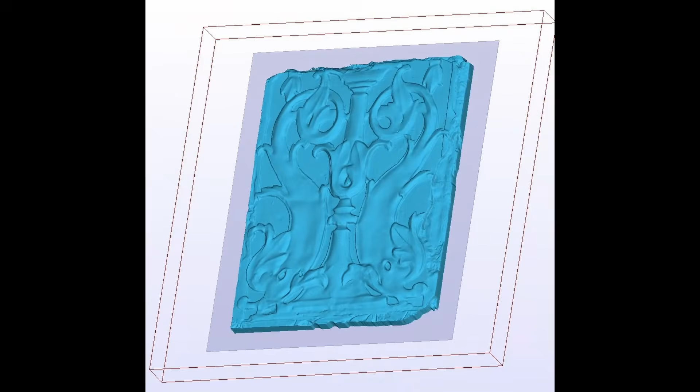From these molds, plaster casts were produced to create accurate, positive three-dimensional models. Each cast was then scanned using high-definition laser technology, preserving the original design intent and safeguarding the minute details that might otherwise be lost. The resulting scans generated exact digital files in the STL format, precise, measurable, and ready to advance to the next stage of the restoration process.

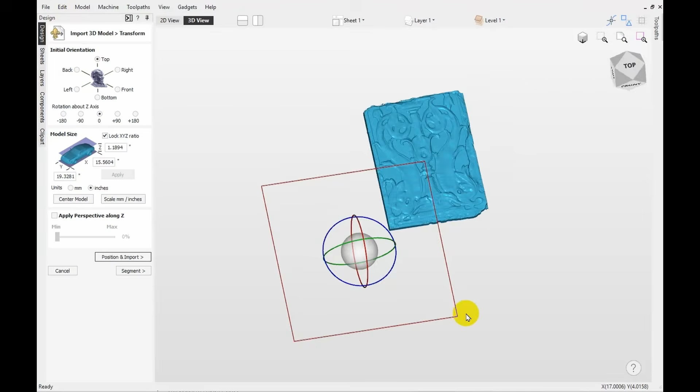The process of creating the lead overlays continued with the fabrication of custom wooden forms used to shape the metal. After importing the STL files generated from the scanned plaster cast, I carefully developed the necessary toolpaths to ensure accuracy and precision.

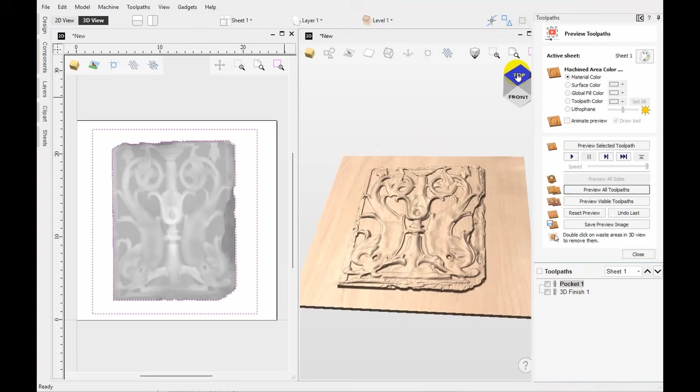In those instances where the original lead overlay was severely damaged and a silicone mold could not be made, I turned to the Vectric software and created my own.

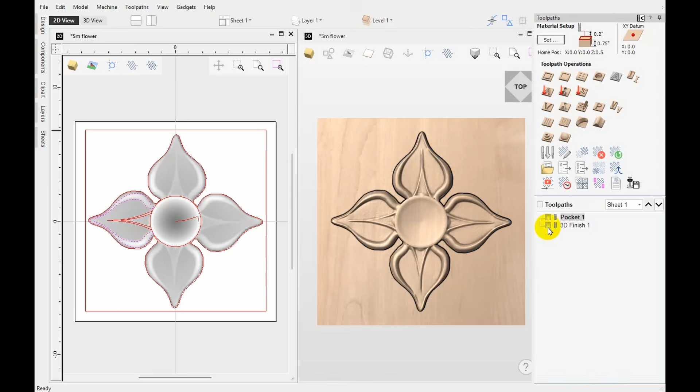Using the components and vectors, I generated a 3D model that looked very similar to the original. Once I was happy with the shape and contours, I created the necessary toolpaths, generally a pocket toolpath and a finish toolpath, to render exactly what I wanted out of my wooden block.

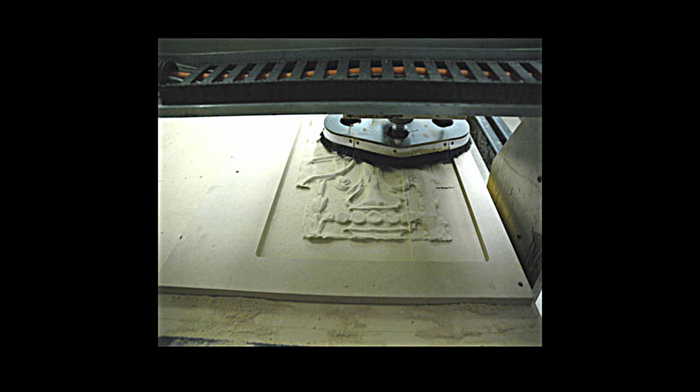Once I was confident the molds would perform as intended, I ran the program on my CNC machine. The finished wooden forms emerged exactly as planned, faithfully capturing every contour and detail required for the next stage. Excitement grew at the studio seeing the finished product from the CNC machine.

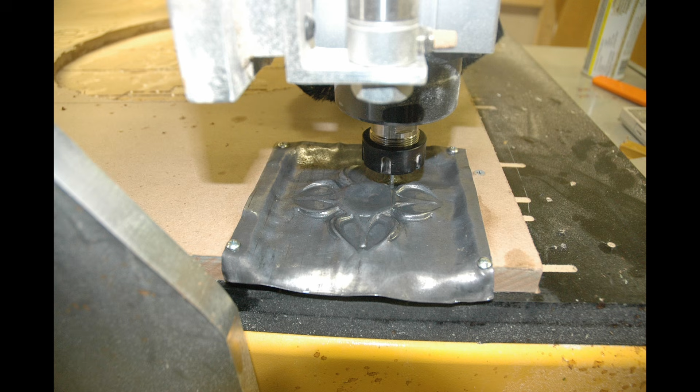With the molds complete, a sheet of lead was secured over the carved forms. Using a spring-loaded ball-bearing plunger, I adjusted the Z height slightly higher and ran the file again. My spindle was turned off in this case.

As the machine moved across the surface, the ball bearing rolled smoothly over the undulating contours, pressing the lead into the recesses and recreating the intricate relief with remarkable fidelity. After a small amount of trimming, the replicated lead overlays were complete and ready for the next step in the process.

This section of the video deals with the fabrication and gold leafing of the stained glass panels needed. The craft of cutting glass is rather old. A simple steel wheel is used to scratch the surface of the glass, and then it is broken along that line, something that's been going on for centuries.

The next step was important. The original glass was frosted, so we applied a diluted solution of hydrofluoric acid to etch the surface ever so slightly, to make it not as transparent as regular glass would be.

The construction of the stained glass panels, known as glazing or leading, entails the use of H-shaped lead strips, where the glass fits into that shape. It is then soldered together for structural strength.

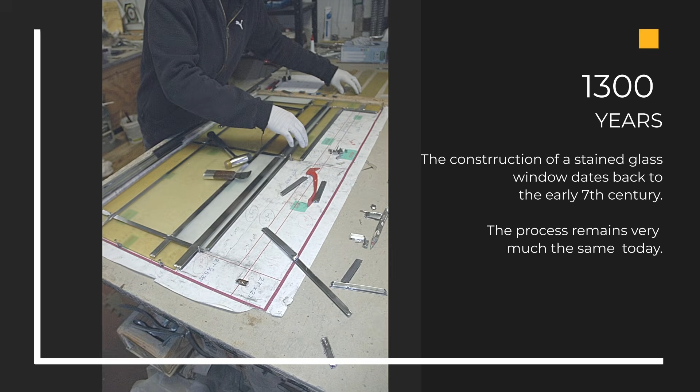Once the stained glass panel has been fabricated and soldered on both sides, the next step, puttying or cementing, is crucial. We use a specialized oil-based putty and force it between the lead came and the glass itself. This provides weatherproofing, rigidity, and strength to the overall panel.

Once the panel has been puttied and cleaned thoroughly, a zinc oxide coating is applied to the leads to ensure durability for the gold leaf.

Gold leafing or gilding was developed in ancient Egypt, with techniques for beating gold into thin, foil-like sheets appearing as early as 3000 BCE. The actual gilding process includes an oil-based size or varnish applied over the surface needed.

When the size reaches a slight tack, the gold leaf is carefully laid in place and gently pressed with a pounce pad or a soft bristle brush. Final cleanup of the glass around the lead overlays is an important part in the overall finished product.

Once the 65 replacement panels were fully completed, each one fitted with meticulously formed lead overlays and gilded with gold leaf on both the interior and exterior surfaces, we were finally ready for reinstallation. Every detail had been checked, every solder joint inspected, and every gilded surface carefully burnished to ensure consistency with the original craftsmanship.

With the studio work behind us, the focus shifted back to the building itself, where preparation was just as important as fabrication. The work site was cleaned to a pristine condition, presenting itself almost like a newly constructed space awaiting its first reveal.

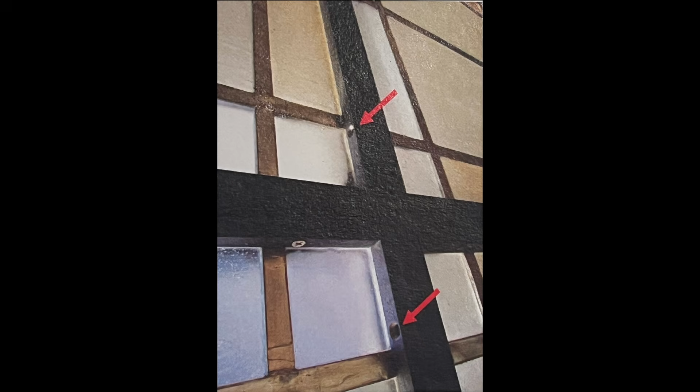Access to the large bronze frame positioned on the second floor mezzanine provided straightforward access and allowed the installation to proceed efficiently. One by one, the restored panels were carefully lifted into position and secured with bronze moldings and brass screws, each fastener tightened with deliberate care.

As the final panel was set into place, the transformation was unmistakable. When completed, the overall effect was nothing short of breathtaking. Light once again filtered through the glass, illuminating the gilded leaded details and restoring the depth, brilliance, and dignity the windows possessed on their opening day.

The exterior shimmered with renewed grandeur, reflecting both the building's historic significance and the artistry invested in its revival. We are deeply proud to have played a role in continuing the life of this important structure, helping to ensure its beauty endures for generations to come.